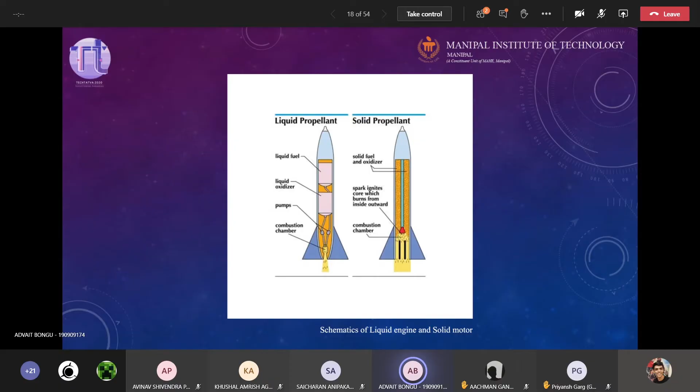In solids, we have aluminium powder. Metal powders are a very commonly used fuel. There's a few others, a few hydrocarbons. Amateurs mostly use a sugar-based compound. Now, what if we combine both of them together?

Potato chips with constant oxygen supply works too, right? Yeah, unfortunately not. You cannot pressurize a potato chip rocket. Pressure is a huge part of what powers a motor, so you cannot use potato chips.

Now, what if you combine both? Can anyone guess what happens in a hybrid rocket? You're looking at it, but what really happens? Oxidizer is separately flowed through the solid fuel section, while in a solid fuel, it is already embedded with the fuel. Yes, in solid, both are premixed. In liquid, both are kept separate.

But hybrids are highly experimental technology and are not used in mainstream and are very rarely used in amateur rocketry. There's a reason why solid is the most popular in amateur rocketry. Can anyone guess why? Why do we prefer solid more than anything in amateur rocketry? Even the rocket we're making, we will be using a solid motor. Yes?

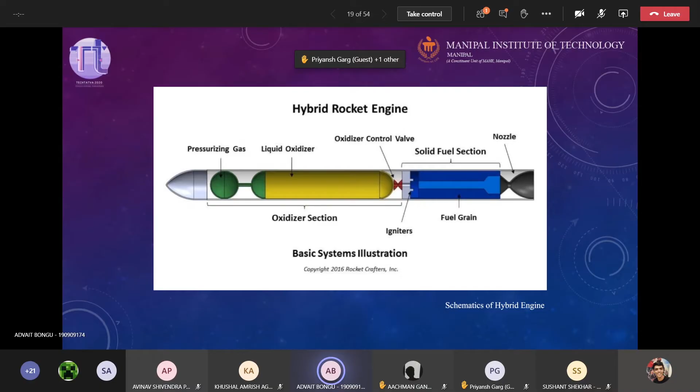They're easier to handle and store. Yeah, they're easier to handle and store. They're also cheaper to develop, easier, less complex. The list goes on. They just don't deliver as much power, but their advantages are a handful. All right, so before we go any further, we need to discuss a few important terms.

But what are these terms? These terms are complex mathematical terms that I will not be going too deep into, but just know when I say specific impulse or ISP, I mean efficiency. Similarly with total impulse, when I say total impulse, just understand that I mean total power delivered by the motor. It's not actually a total power, but it's effectively the force.

It's the integral of force through burn time, right? So it's measured in Newton seconds. But when I say total impulse, just think that I'm saying power of the motor. It's a very easy analogy. So think of it like that. The actual mathematical meaning of these terms is too complex for the purposes of this workshop.

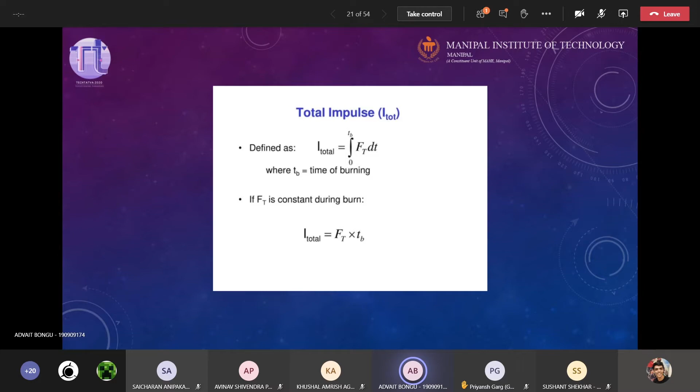Right, nozzle. So we've been hearing a lot about our nozzle. What is a nozzle? Can you guys answer? Anyone? What is a nozzle? It is the place where the exhaust gases are released to produce a thrust. Yes. Okay. So it's the place where exhaust gases are released to produce thrust. Any other answers? Yeah. Just speak up. Priyansh. Anyone else? Akhil also had his hand up. Oh yeah, Akhil.

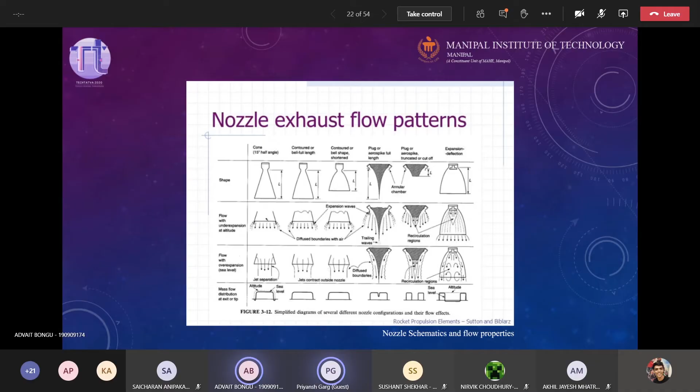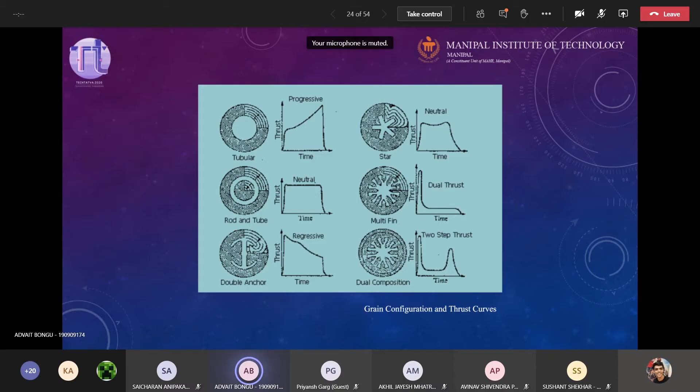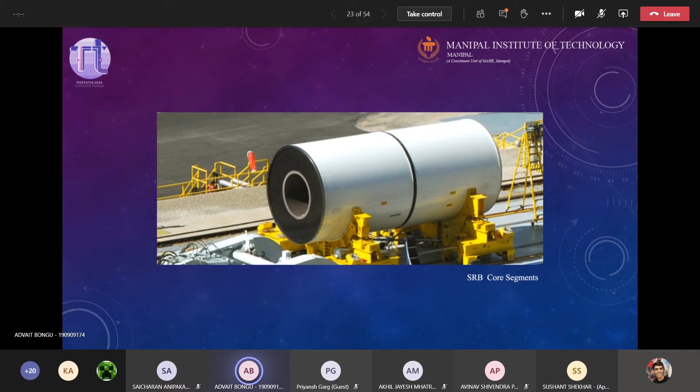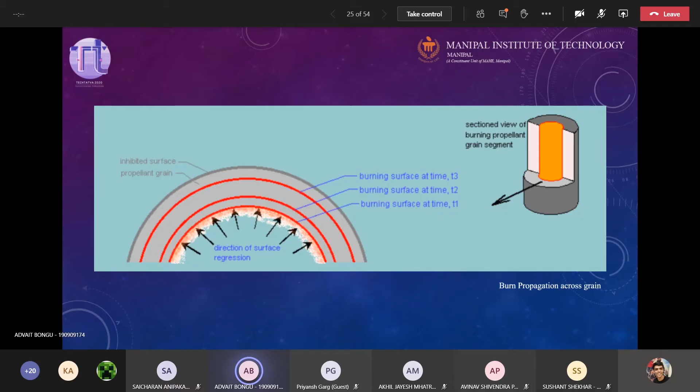Okay, thank you. Is it understandable? Because grain is a very important terminology. So your propellant cast in its form inside the motor is the grain.

Alright, let's move on to COTS and SRAD. COTS is basically commercial off the shelf, which means these are motors you buy. Companies make them, you buy them, you use them, it's as simple as that. You don't really develop anything. Up till now, everybody has shown you how the rocket is built around the motor. With COTS, there's nothing really in it, you just put a motor in that rocket and fly. You do build the rocket with respect to what motor you're finally going to use, but you have no say in what goes inside the motor or how the motor itself is made.

A COTS motor is desirable because they're efficient, built by people with a lot of experience. They're cheap and mass produced. They're safe, built with a very high degree of safety to conform with all international standards. And they're reliable, again because they're built by people with a lot of experience.

SRAD motors depend on the student developing it. If you have a brilliant team, your motor will easily outperform an equivalent COTS motor, no doubt about it. But for beginners, that's hardly ever the case. You cannot make a motor on your first try, and for amateurs it's not advisable to make a motor. It's much better to stick with COTS, because the amount of safety you get with COTS, you simply do not get with SRAD. SRAD is a very dangerous affair.

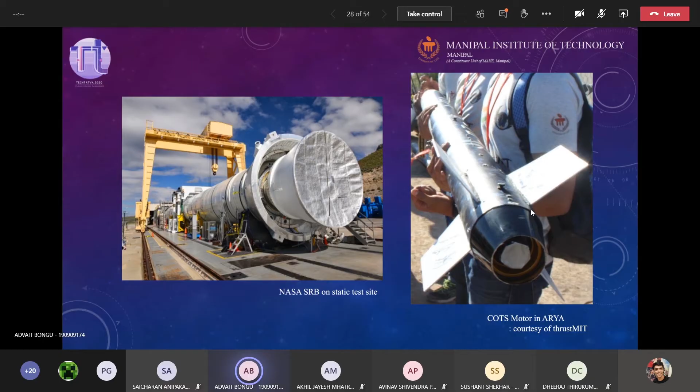Now this particular cover, in both cases, is made using a special aluminum sheet for maximum protection. All right, so static testing. Now, why is static testing important?

No two solid motors are ever perfectly the same. You can try to mass produce them, but you'll get slight differences in the grain, simply because that's how the process is. So why is static testing done on motors that mostly won't even fly? A very similar version will fly, but that particular one won't.

So why do you have to static test it? To calculate its thrust. We calculate thrust using mathematical means, but you can't accurately achieve your thrust that way, it's impossible. There are too many variables involved.

You also need to test the structural strength of the SRB. Testing anywhere in engineering is a vital thing. You can prove it mathematically, you can prove it with simulation, but you must always prove it through testing. You must physically prove it. First we have to show that the nozzle can take it, the entire casing can take it, the head can take it, and that the burn properties are also what's expected. So you're getting the desired total impulse out of your motor. That's something we look at in testing.

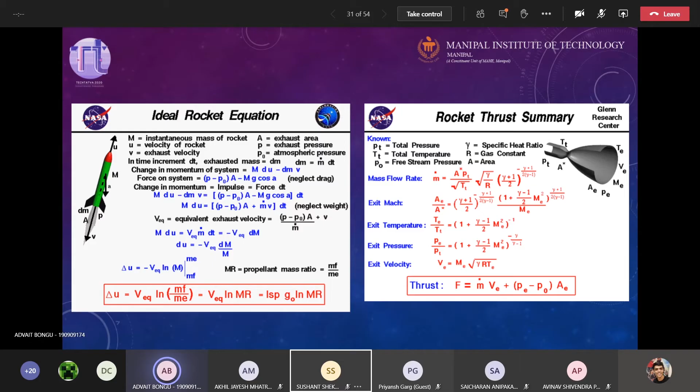Our target apogee is 3,000 meters, and our rough rocket weight right now, I'm not actually sure, but looking at the way it's going, it'll probably end up around 23 kgs mass. If you plug these into the equations given behind - plus more equations solved with drag included - it'll probably require an M or an L, or maybe even an N class motor.

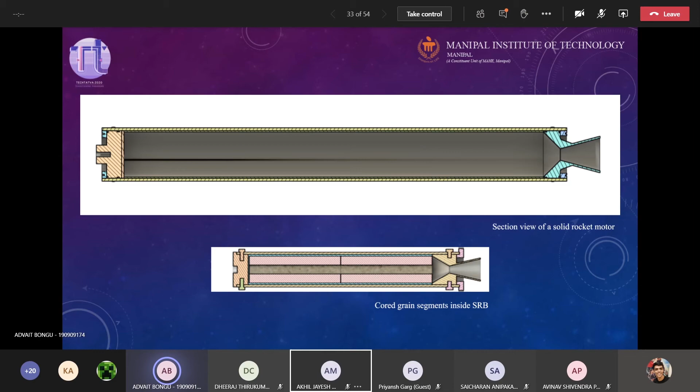This ignites a granular propellant, and this propellant sort of works like a shotgun. It fires in all directions. This is usually placed somewhere near the bottom. Now this pyrotechnic is only used in small motors. So in the classification we saw earlier, it's only used in these. Anything above an O, you have to go to a different realm of ignition. We will not look into that. We'll just stick with small ignition. So this is used for small solid rocket motors.

This shotgun-type action spreads this hot granular ignition mixture everywhere, and this ignites the internal surface of the core. This is placed usually right above the nozzle, and the electrical leads are directed either through the nozzle or through the head as per design. But for convenience, it's mostly through the nozzle. They're just shot out of the nozzle when the motor ignites.

The spark plugs that you mentioned, those are used only for liquids. You cannot ignite a solid using a spark plug, simply because the spark plug does not produce the required amount of energy to ignite a grain. Grains require a lot of heat to ignite. With liquids, you have two highly combustible gases coming in contact. It takes very little energy to ignite them. So you have a very high-powered one; it's similar in principle to what you have in a car, but it's actually very different in design. That's used in liquids.

Okay, so we have an igniter ready. Now we insert the igniter as designed and then we just leave it on the pad. Is that safe? Is it safe to have an igniter where the only thing standing between an ignition and a safe state is one electrical current passing through it? Understand that the battery has also been wired in. So is this a safe scenario to have? Or is it a desirable scenario?

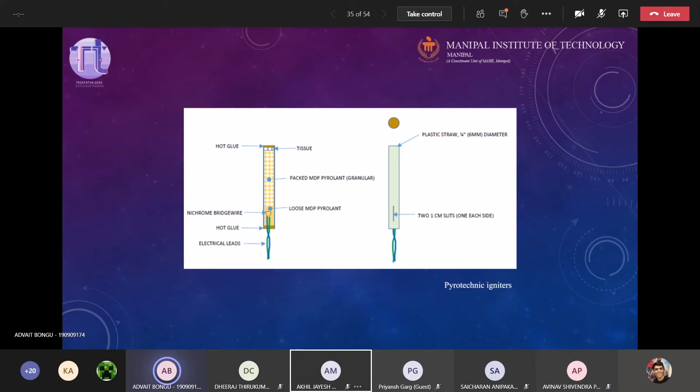So Aneesh, can you please bring the ORK up? Let's walk through how to insert a motor into the ORK. Okay, at this point we have extended our time limit by a lot. So please bear with us, guys. It'll be like 15-20 minutes more and we'll wrap up the session. And Advait, could you please only use one motor for the demo? Yeah. Okay.

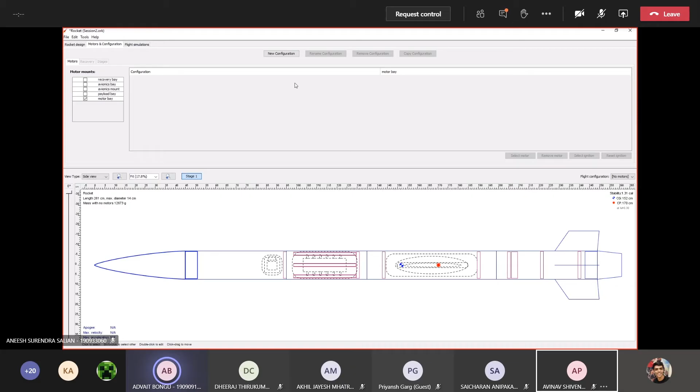So now we have to insert a motor. We go to motors and configurations. First step is designating a motor mount. In this case, we clearly labeled it the motor bay, so the motor bay is the motor mount. We just select the required option. We now press new configuration, select motor, or we just double click on the blue line.

Now in your options, all will be selected. So Aneesh, please hit clear all. First step is to hit clear all to remove everything. This is the situation you would be at. Now we'll have to make an assumption. Let's assume that AeroTech and Cesaroni are the only two manufacturers available to us. The rest for some reason are not available. So this filters it out quite a lot. We already know we want an L through an N, so we'll add that filter into total impulse.

Actually, now that I'm looking at the calculations more carefully, I know that even an N probably will be an overkill, so we'll move it down to an M. The filter will just make it purely M. Even the lower bound onto an M, please. Thanks. Motor dimensions. So now first the diameter.

So usually M's for COTS are around 75 to 98. So that's what will make the lower and upper bound, 75 and 98, and length we shall make between 500 to 700. This is all basically with what you have designed. These are not arbitrary numbers that I'm saying. So this is basically the dimensions that will fit in our rocket. So we're taking these dimensions and filtering.

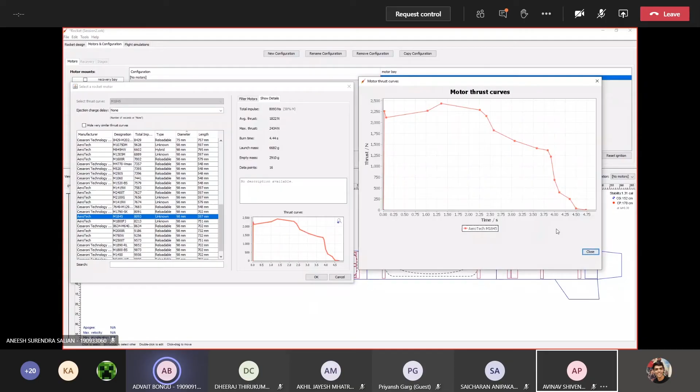So all of these are crucial for deciding, but all of this looks good to us. We're getting the total impulse we want. The burn time is nice and steady. Your average thrust is good. Your max thrust is something our structure can take, because you have to design your structure to take the max thrust. So we will go ahead and close the thrust time curve and press OK to insert the motor.

Okay, now you can see that the motor is not really sitting right. It's halfway up the payload bay. So we will go to motor mount or motor bay, go to motors option and set in the required overhang. So now the rear end of the block you see is the nozzle. It comes as the same diameter, but in reality it's depicting a nozzle. So we'll push the nozzle to the end of the boat tail where it's supposed to be. So this is our motor overhang.

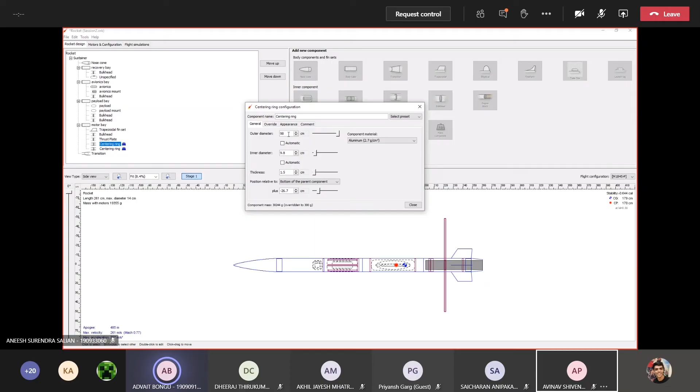Now if you remember, all the centering rings are hollow; they're not a solid piece. So we should now set the appropriate internal diameter. In this case, 98. 9.8, 98 cm, and the required outer diameter. Okay, so if this happens, you can just click on automatic. It'll reconfigure itself. 13.6. Okay, so see, it falls right back into place. You'll have to always keep track of your units, not only in rockets, but in engineering in general.

Now you can also see our dampener and our thrust plate are halfway down the motor. So we'll have to move them back up. We just go to the correct required component and just move the position relative to the required parent component and just move it up. It's as simple as that. So now our motor bay looks like what it looked like in the CAD that Kushal showed you, right? The motor bay was a bit longer than required, so we'll reduce that.

So now we can see our apogee. It's good. We hit our target. 3000 has been hit comfortably. And all the parameters are good and stable. But there's one thing that's missing. If you look at stability, which was explained to you yesterday, it's completely ruined. It's negative right now. CP is ahead of CG. This is because when we added the motor, we pulled the center of gravity backwards. So Aneesh will now walk you through fixing this.

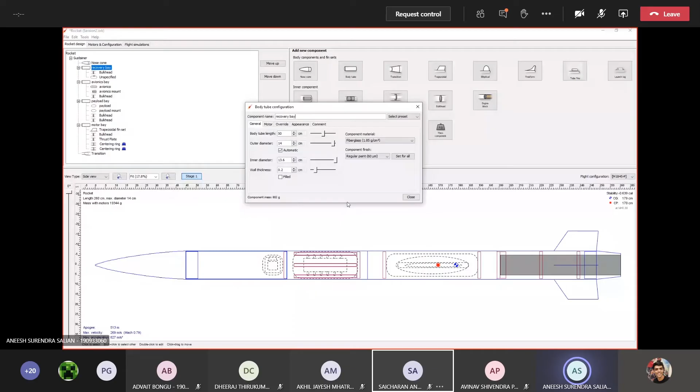So first I'm going to start off with adding a parachute, just a dummy parachute, so that we can finally calculate the entire mass of the rocket, because we need that for the calculation. So the parachute which we are going to use has a CD of 1.1. Let's keep 30 as it is for now. Let's keep it as default. So it's just there. And wait, let me just change the size of the parachute.

Now the parachute is done. So now what we need to do is bring the mass forward, right? So how do we bring the mass forward is we're going to be adding some dead weights to it. So how do you add dead weights is you choose your option.

And over here, as you can see, Kushal has forgotten to add the nose cone bulkhead. So I'm just going to add a nose cone bulkhead to it before doing anything. So this is optimization. Okay, so you need to remember what all goes in the rocket and make sure that every part is there and everything is done properly. So let's add a bulkhead.

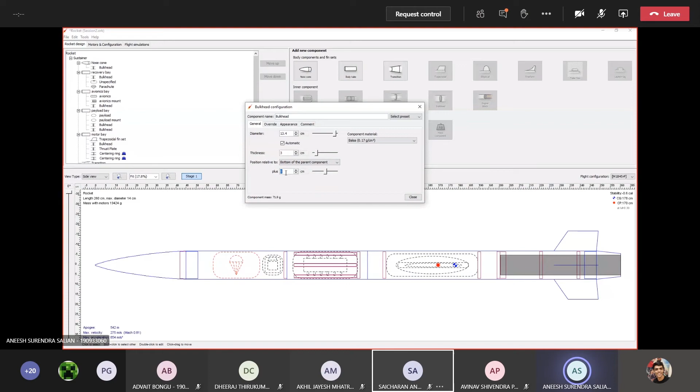And let me go with Balsa because Kushal, if you remember, he did a custom WPC on this thing. But right now, since we don't have it, I'm not going to do a custom. I'm just going to go with this. Let's keep the thickness as 3. So yeah, I've placed the nose cone bulkhead for now. And now we just need to add some dead weights to the front.

So go to mass component, same option. Let's see, I need to bring it a bit forward, right? So let me add a mass of around 1,800 grams. And let's give it some length as well. So the length I'm going to be giving it is around 12 centimeters in length and dia about 6 centimeters.

So now this weight that I'm putting, it includes the mass of the nose step as well. So you might have seen in previous images where we have attached the nose step. So now our stability has come a bit forward. So the CG has moved front. Now I'm going to bring back the CP. So how do we do that is by changing the fins.

So now I've previously put these values, right, for the dummy fins. So now I'm going to change them back. So let's see, let's increase the height a bit. Let's go with 13. Let's see, 27 if I remember. Yeah, and tip chord, let's reduce the tip chord. Let's try increasing the height a bit more, 13.5.

Okay, so as you can see now, since I've done the optimization, the apogee has reached 3,474 meters. So that's good. And the fins, I'm going to change the material of the fins as well because it isn't there. We're going to use acrylic and let's go with this. So I feel like now we're done with this. Now I just need to add a few more details to this.

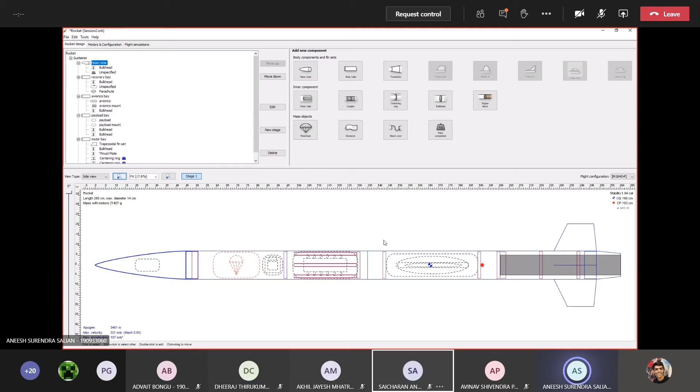So now since we have gotten a nice stability, I'm going to add some launch lugs. So you guys know what launch lugs are, right? Or no? So when we are launching the rocket, we need it to go in a straight upward direction, right? So there is something known as a launch rod from which you'll launch it. So the launch rod holds the rocket in an upward position. So for that, you'll have to use launch lugs to keep your rocket attached to the launch rod.

So I'm going to be adding 2 launch lugs in this. So over here, you can see the option of launch lug. So let's go launch lug. I have the dimensions of the launch lug ready. Launch lug materials are like styrofoam or PVC or something like that. So they come in a specific dimension. So this launch lug has 1.61 as its outer diameter.

So the radial position is the position of where it stays. So right now, if you see, it's in the same line as the fins. So the rod won't be passing through. So I'll be changing the radial position. Let me give it as minus 60 degrees. I know I'm a bit fast, but please bear with me. So let's keep it at the bottom of the parent component.

Okay, so one launch lug is done. Now I'm going to add a second launch lug in the avionics bay. So let's go. Same procedure.

Radial position is also the same value because the rod needs to pass through both of them at once. So bottom component 0, and you can see it, right? Okay, so the material of this as well, styrofoam. As you can see now, the component mass is 0.03, right?

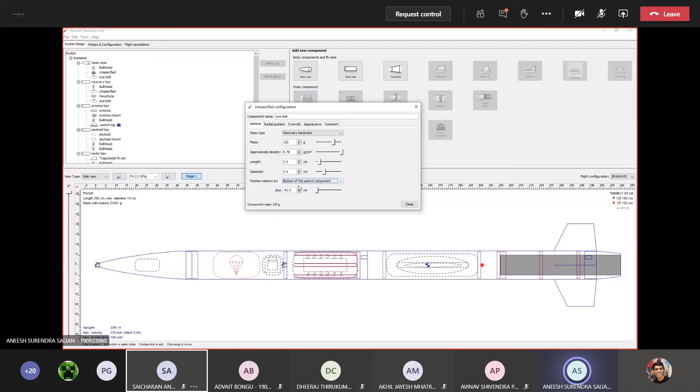Yeah. So now we're going to add another eye bolt. Yeah, okay, so the 2 eye bolts are done. Now we need to add a shock cord and a swivel link, which I showed you yesterday as well. So now we're going to add the shock cord. So before I add the shock cord length, I'll talk of the parachute. Let me just add the swivel link as well. Place it at the middle of the parent component. So the swivel link is placed.

Now I'm going to go back to parachute. So after this mass you have gotten, you're going to put it in the parachute equations, which I showed you yesterday, and you're going to find the diameter of the parachute. The diameter which has been calculated right now is around 240 centimeters. Now shroud lines. Shroud lines, as I showed you yesterday, were the suspension lines. My parachute has a 10 line configuration, so I'm going to add 10 lines, and the line length.

So the shroud line length should be good enough so that when it goes out of the recovery system, it can go to that length and properly inflate without any obstructions. So let's give 250 centimeters as the length of the line. And deployment. Remember always to set this at apogee if you're doing a normal launch, or else there's other options as well. But for now we're going with apogee. So now my parachute is done.

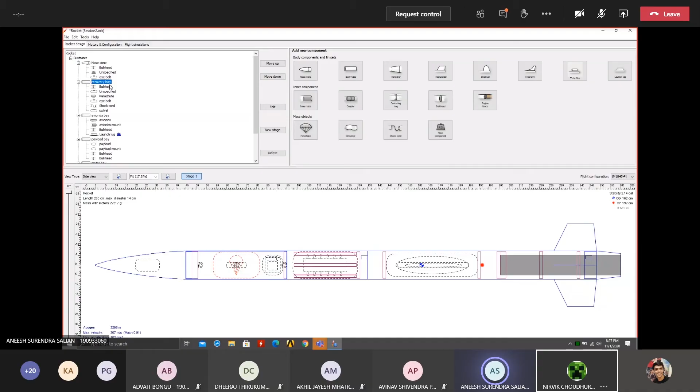Yeah, Aneesh, before we move on, actually, I think the couplers are misplaced. If you can add. Oh, okay, 1 second. The couplers. Oh yeah, I totally forgot that. I'll be quickly adding the couplers as well. By the time Aneesh is adding the couplers, we can see that the apogee is reached and we have a good enough stability. So what do you guys think the next step would be? Anyone?

Mm-hmm. Okay, so I'll actually answer the question. Right now we have a target apogee, we have the stability, but we don't actually know what's going to be the path of the rocket, or whether it's going to come back safely to the ground, and we don't know what's going on in between the flight. So if we want to check all that,

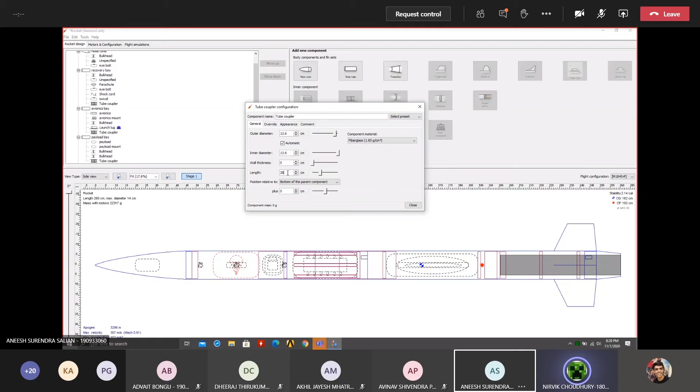we can manufacture a lot of these same models, iterate a little bit of everything and fly them until we get the perfect flight. But that's not going to be economically feasible, nor is it actually safe, because we are talking about stability.

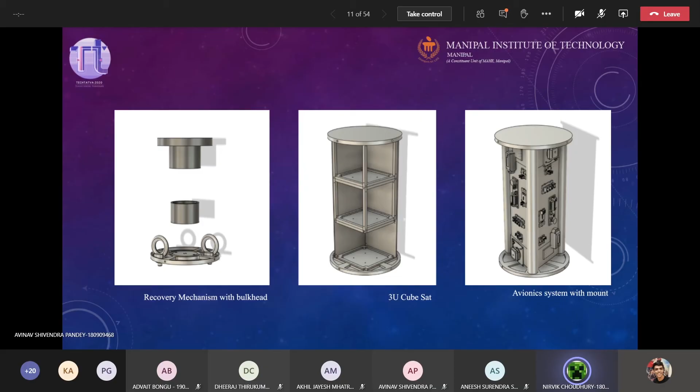Initially, we don't know what's gonna happen and it can be extremely risky. So the feature which enables us to help in this situation in engineering is something called simulations. So the first thing we do after designing the rocket is a few simulations, and then we'll move into the actual manufacturing phase of the rocket.

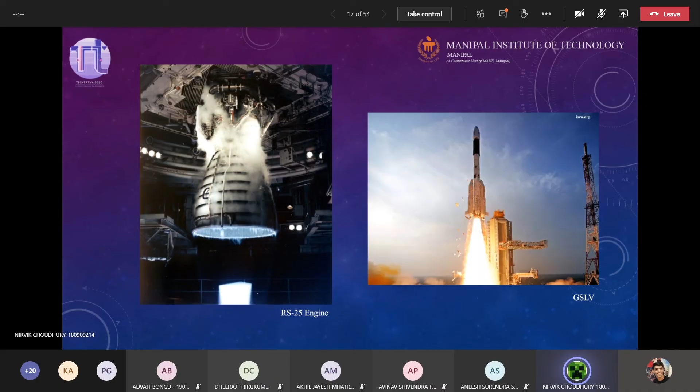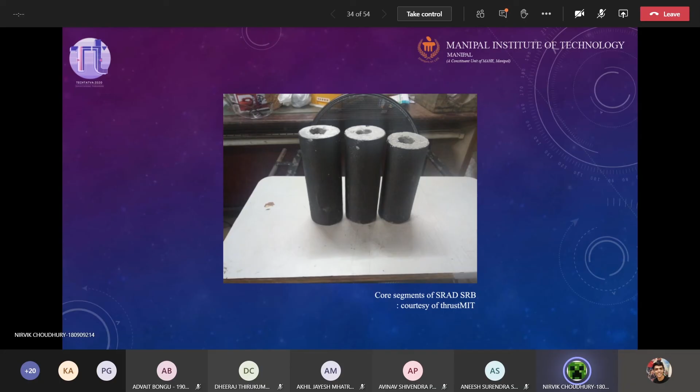Before moving into the simulation part through the software, I'll want to talk a little bit about what is actually happening in the background. Pardon me, if you can give me a moment for the presentation to load up.

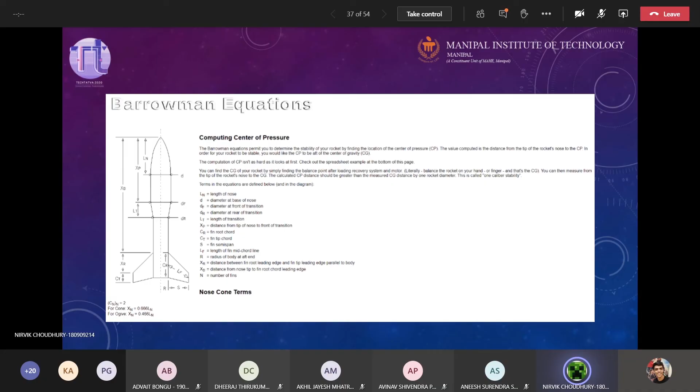This is how OpenRocket simulates and calculates everything. There's a lot of mathematical stuff going on, and I'm not gonna go deep into it, but there's a few things that govern the whole thing. The first and foremost is the Barrowman's equation. This equation helps us get the actual stability of the rocket, which is mainly calculated by two major terms: the conical transition term and the fin terms.

And then, finding the center of pressure and using the mathematical equations that we have, we actually calculate the stability. Now, all of the mathematical equations used for calculating stability are differential or integral equations. And since solving them isn't a really fast way to do it, we rely on a numerical method. The numerical method explicitly used in OpenRocket software is the Runge-Kutta fourth order method.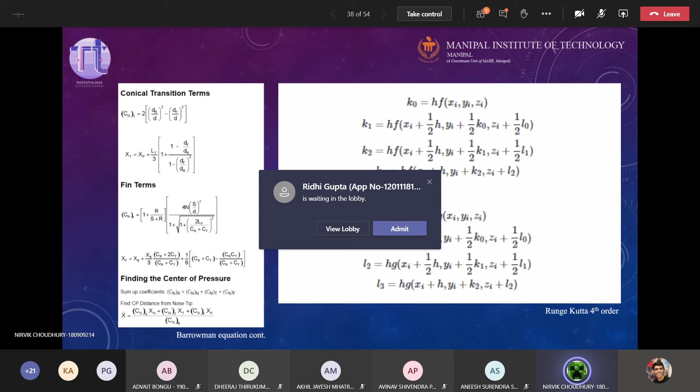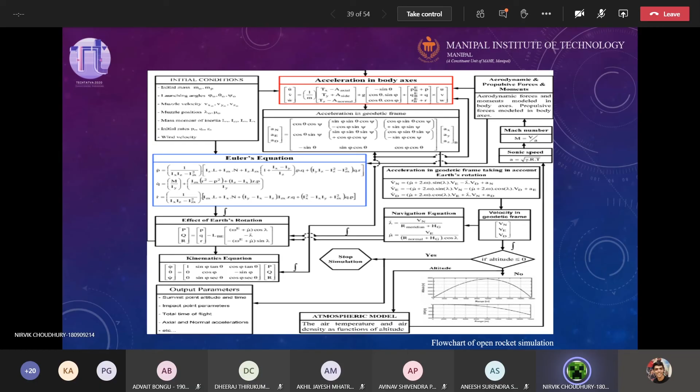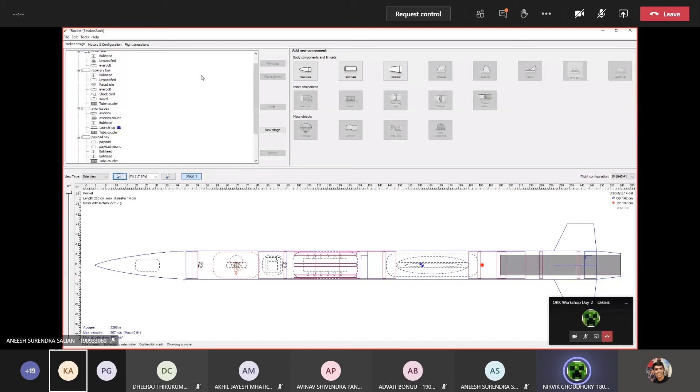Okay, can everyone see the ORK window? Yes. So with the rocket design and motor configuration, we have the simulation options.

Now, if we click on the new simulations button, it will open a window which enables us to start the simulation. This window gives us all the flexibility on how to set up the initial conditions of the simulation. According to the launch site where this rocket was launched, we're going to set the launch rod to 518 and the average wind speed to 2.5 meters per second.

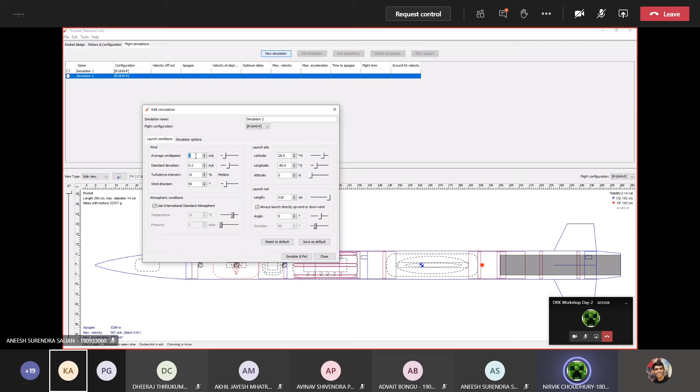Now, if we move to the simulation options just beside launch conditions, here you can see the geodetic conditions we are going to use. The spherical approximation is the easiest and closest to what Earth actually is. The ellipsoid uses more complicated equations to get more approximation and more accuracy. And let's just not talk about flat Earth. I mean, come on. So right now, let's go ahead and simulate and plot what we have.

Now, altitude, vertical velocity, and vertical acceleration are the default plots you're gonna get. Just for simplicity's sake, we're not gonna use a lot of parameters, but we'll add two important ones. If we click on new y-axis plot type, we get all the parameters that can be put into the simulation. So the first parameter we're gonna insert is stability margin calibers.

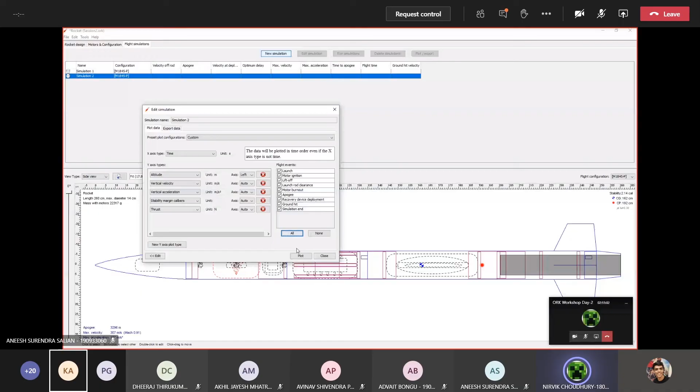This parameter is going to give us the whole stability throughout the flight. And the second thing we want to know is the thrust - the thrust time curve, what's going on during the flight of the rocket. Now just right to it, we can see the flight events. For the description right now, we're going to select all of the flight events and see what's going on at each time. Anish, if you can go on and plot it.

Okay, so this is the plot we're getting for the separate parameters we've chosen. So now the stability you can see on the window behind it, where the model of the rocket is, that's the stability when it's stationary. But we want the stability to be between 1.5 and 2, as Anish said before, when it actually leaves the launch rod. So now let's zoom into the position where the rocket actually leaves the launch rod.

Okay, so this is the part where we have it. If we zoom in, we want to make sure that the stability at the launch rod is like what we want. It should be between 1.5 and 2. Yep, so now we can see it's somewhere below, between 1.5 and 1.75. So this is what we want.

Now, Anish, zoom out a bit. Yeah, zoom in on the stability margin again.

By the way, the pink one is the stability margin, in case it's not clear to somebody. So along with the value of stability margin at the launch rod, we want to make sure there is not much oscillation during the flight time. The pink line you can see is the oscillation, like the deflection of stability margin. Right now it's fairly good during the ascent, and even after burnout, it dies down smoothly.

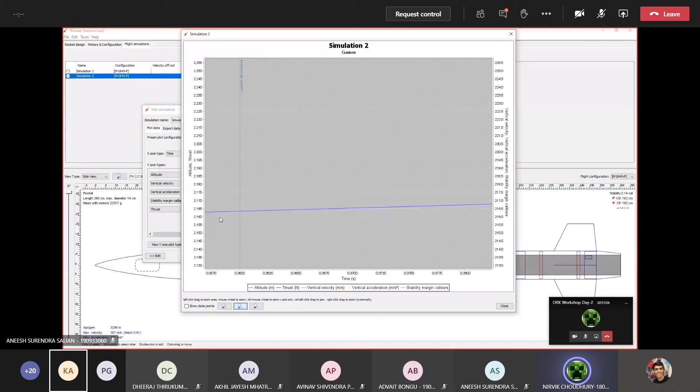So as we can see, just at the launch rod, the value of thrust there is coming around 2165. What we want to do with this value is there's something called a launch criteria for solid rocket. Does anyone know what it is, or what the thrust to weight ratio should be?

Okay, if not, then answer one question: if you want the rocket to fly, what should the thrust to weight ratio be? Any value more than 1. It should be greater than 1, right? Yeah, but actually with the safety factors taken into consideration, it's not just more than 1.

The explanation for that is a bit lengthy, and I won't get into why it is. If you want to know, you can stay behind and ask. But there's something called max Q, where the aerodynamic force on the rocket is maximum, and at that time we want to know what the thrust is at that point. It should be around 2.5 times according to the calculations, and taking a factor of safety of 2, the thrust to weight ratio which is considered safe universally is 5 at the launch rod.

Now if you can see, it's almost 2165 Newtons there, and the mass of the rocket is around 22 kg. So roughly, if we divide it, it's going to be around 9 point something, which is way above our estimation. Since you can't just take the thrust value high enough to satisfy the criteria, you need to make sure that your structure can actually take that thrust value. So here we've seen that the earlier criteria is fully satisfied, and also the thrust to weight ratio is satisfied.

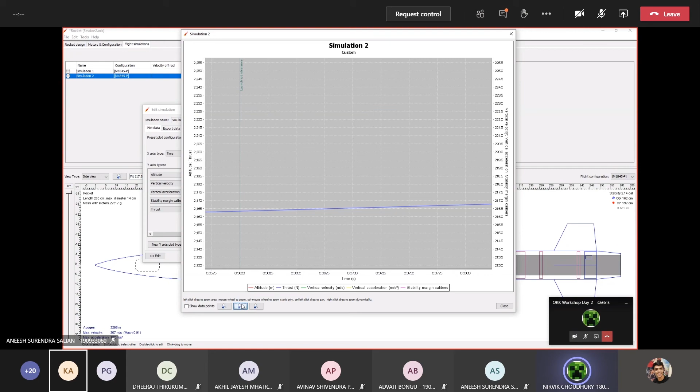So this will more or less be all for the simulation in OpenRocket. Right now we'll move back into the presentations.

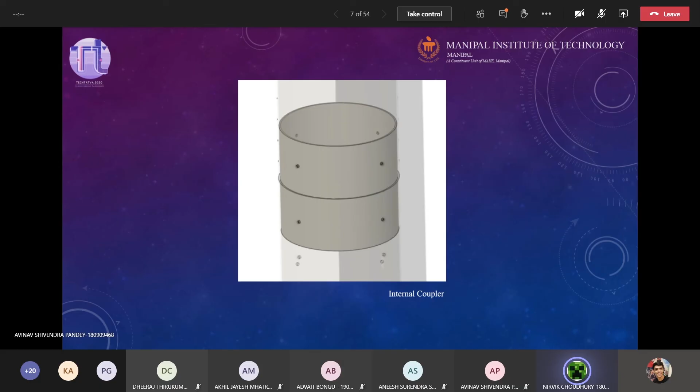So does anyone have any questions?

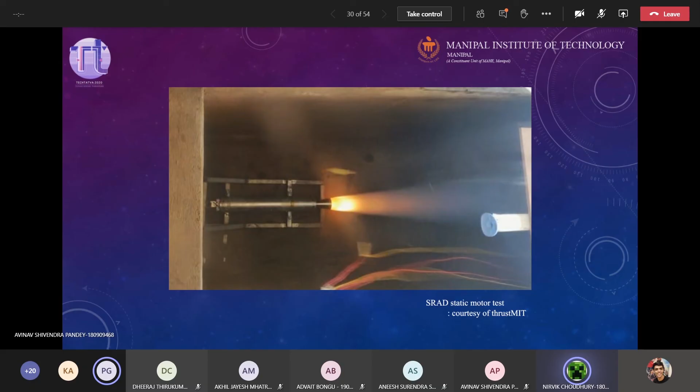Where are we going to import the CAD? Someone told yesterday in the workshop that CAD will be imported. CAD, are you talking about the modeled CAD or the ORK? Yeah, someone told that the model, the parts we make in CAD, are imported in ORK and then fitted in here.

The mass override that you've seen during the making of the centering rings and stuff, right? Right now we already have the data on the rocket, like what the manufactured parts weigh and stuff, so we have already overridden it. But when you're making a model from scratch, you want to make the CAD and then again change the weight of all the components to what the actual weight is going to be. So while we were making the stuff, we already took care of it.

Okay, so now that you have seen the simulation, you now have a basic idea how to design a rocket. The next step would be making the CAD of it, and that concludes the design of the rocket in just one part.

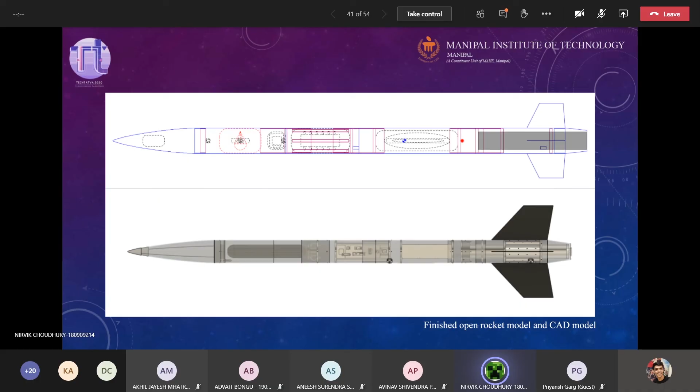But that's not all. To actually be able to fly a rocket, you need to check each and every part of the rocket, simulate each and every one of them, and see if the parts separately are good enough to actually fly. Can they take the stress?

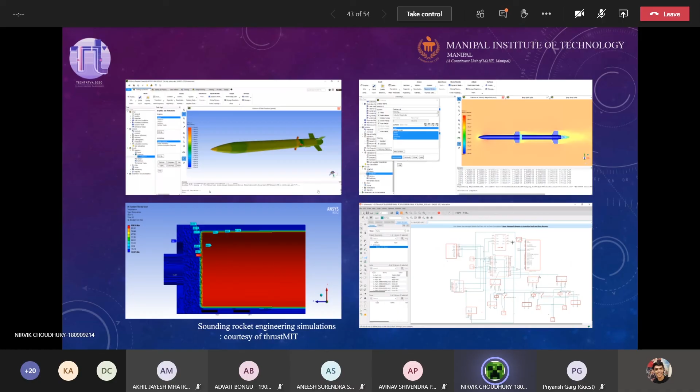Then in the bottom left corner, we have a simulation of the motor head. This shows the thermal aspect - how the heat is dissipating through the liner into the material - and how the structure is going to hold. Beside that, we have a schematic of the working flight computer. All of these simulations are supposed to be done before these things can actually go into the rocket.

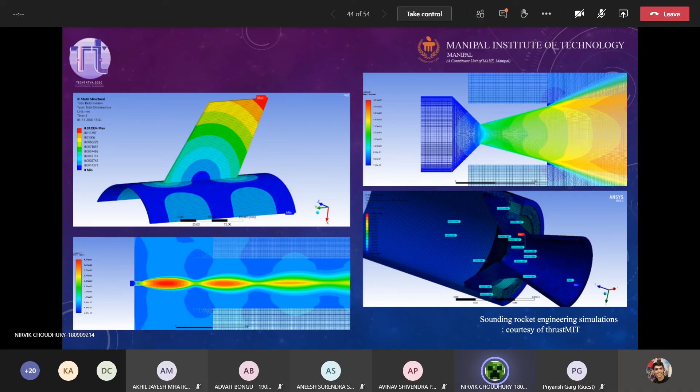So once you have simulated each and every separate part and made iterations on it and finally designed it, you go back to modeling, import everything back to ORK again, and after several iterations, you are actually in a position to go ahead and manufacture a rocket.

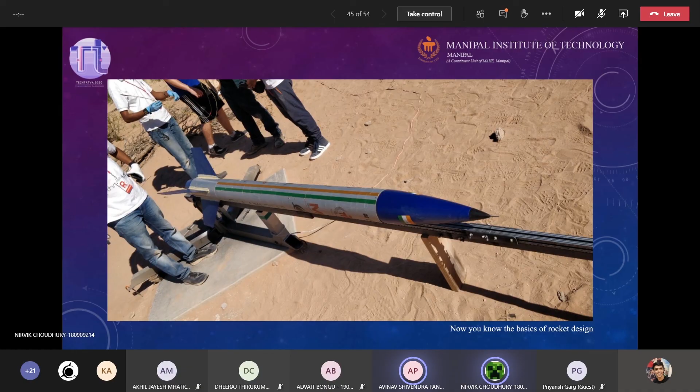Okay, pretty good. Now we have done very basic modeling and designing on ORK, but ORK or Open Rocket is a very powerful tool. It enables us to do a lot of things.

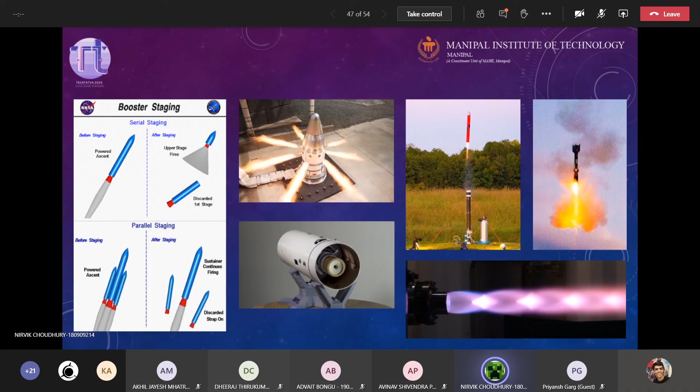Lastly, what you can do - we have talked about COTS and SRAD motors. So there's also a provision if you're making a motor by yourself. It's out of scope right now to explain how you can actually make a motor, but I'll go through the steps briefly. While making a motor, the first step is to actually go and select the propellant we have.

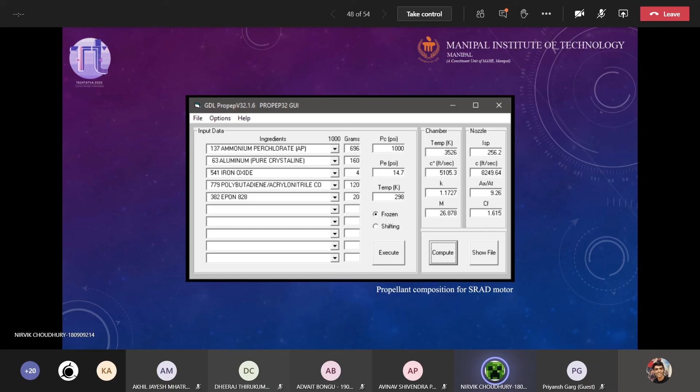Here, for example, we've taken ammonium perchlorate based propellants. Once you've selected the propellant, there are a few software tools like SRM Sheet, or Solid Rocket Motor Sheet, by Richard Nakka—you guys can check him out. Then there's RPA, Rocket Propulsion Analysis software.

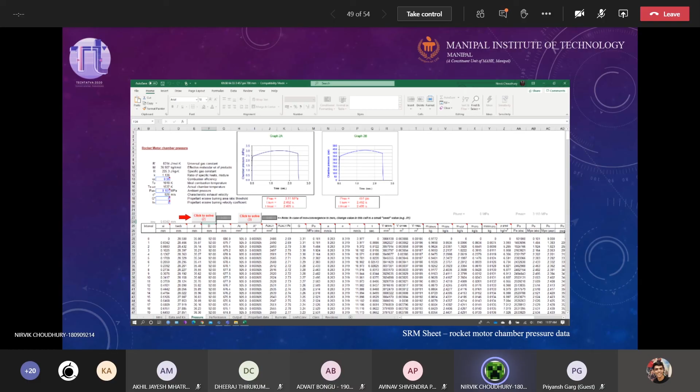You want to decide the chamber pressure you want to have, reiterate, check the data, and simulate it to see if it's holding. Then you want to go through and design the nozzle for the motor itself—it will be mostly different every time. For the thrust value and burn time you want, you have to go through all the designing of all the equations here. I'm not going to delve into it right now.

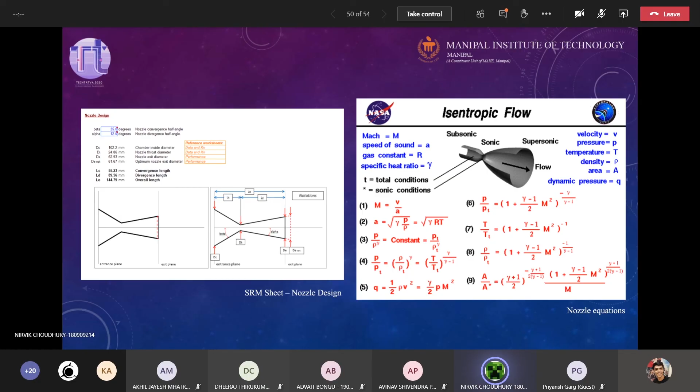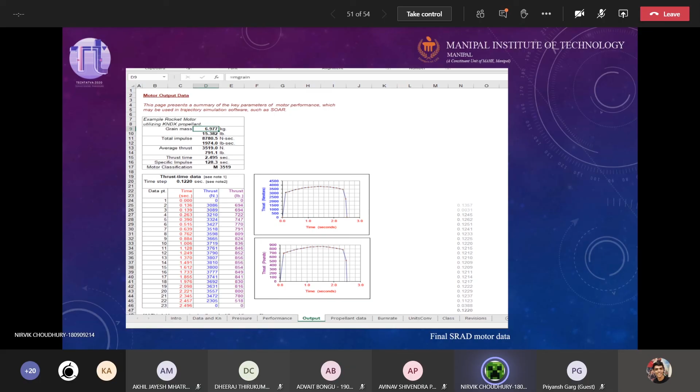Then the last step is making the motor and checking the class of motor you want, and the thrust you're getting, making sure all of those are on par with what you need to actually fly the rocket you've designed to apogee.

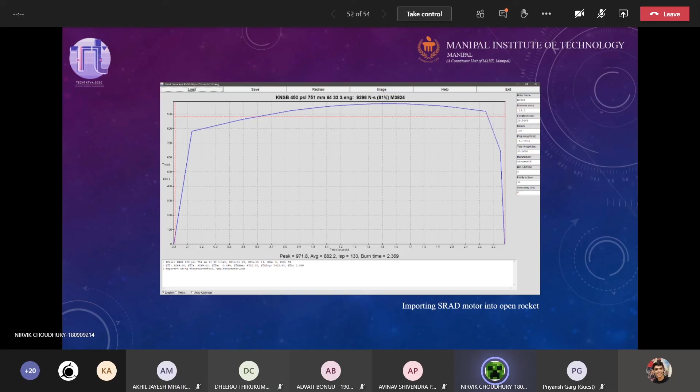Once you're done designing the motor, there's something called a thrust curve tool. Using that, you can import all this data into the tool and export a file with an extension of ENG, which is basically an engine file, and that engine file can be imported into Open Rocket to actually use the motor you've made for the simulations.

So with that, we would like to conclude here, and if you guys have any questions, you can go ahead.